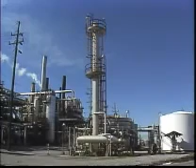In industrial facilities, many operations depend on heating or cooling process fluids. For example, the liquid entering this distillation column is heated to enable the distillation process to occur, while this process liquid is cooled so that it can be properly stored. This heating and cooling is done by transferring heat from one fluid to another in devices called heat exchangers. To understand how heat is transferred, it's important to understand what heat is.

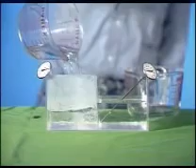Heat is a form of energy that's associated with the movement of molecules in a material. This energy can often be measured as temperature. For heat transfer to occur, there must be a difference in temperature. When there is a difference in temperature, heat is transferred from the material with the higher temperature to the material with the lower temperature. Heat can be transferred between materials in three basic ways: by conduction, convection, and radiation.

With conduction, heat is transferred as a result of physical contact between two materials, or from one part of an object to another part of the same object.

Another form of heat transfer is convection. Convection is the transfer of heat within a moving fluid. Convection can be divided into two categories: natural convection and forced convection.

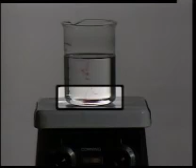We'll use this container of water and dye to show how natural convection works. As the water is heated, the water closest to the bottom is heated more than the water elsewhere. As the temperature of the water on the bottom increases, that water becomes lighter or less dense and rises upward. At the same time, the cooler water sinks to the bottom of the container.

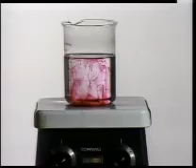So during natural convection, as heat is transferred to the water, the difference in densities causes the water to circulate in the container. This circulation helps to transfer heat throughout the water.

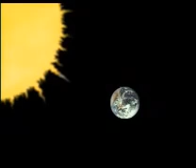The third form of heat transfer is radiation. Radiation is the transfer of energy by electromagnetic waves. Microwaves and light waves are examples of electromagnetic waves.

When electromagnetic waves strike an object, they may be transmitted through the object, reflected off the object, or absorbed by the object. If a wave is absorbed, its energy is transferred to the object and the temperature of the object increases.

In a typical heat exchanger, heat is transferred by conduction, convection, and radiation from one fluid to another. As a general rule, most heat transfer occurs by conduction and convection.

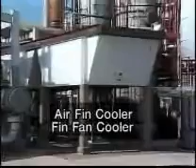To get a better understanding of how heat transfer occurs in a heat exchanger, we'll use this heat exchanger. It's called an air fin cooler, or a fin fan cooler. It's used to transfer heat from a process fluid to the air that flows through the cooler. The cooler consists of a series of tubes, each of which has thin metal fins.

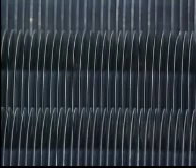The heat exchanger also has a fan. During operation, the fluid being cooled passes through the tubes. The fluid transfers heat to the tubes by conduction and convection. Some of this heat is then transferred through the tubes and into the fins by conduction. From there, heat in the tubes and the fins is transferred by conduction and convection to the surrounding air.

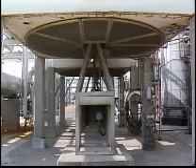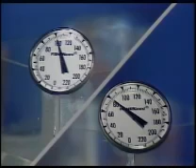To increase the amount of heat transferred to the air, the fans in the cooler can be started. This increases the airflow through the cooler, which increases the amount of heat that is transferred by convection to the surrounding air. For example, as the difference in temperature between the two fluids in a heat exchanger increases, the amount of heat that can be transferred also increases.

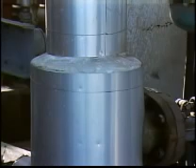The amount of surface area in a heat exchanger is another factor that affects heat transfer. Basically, the greater the surface area, the greater the amount of heat transfer that can occur. Another factor that can affect heat transfer is the type of material that the heat is transferred through. Materials that are more dense are better at transferring heat and are normally used as conductors of heat. On the other hand, materials that are less dense will transfer less heat and are normally used as insulators.

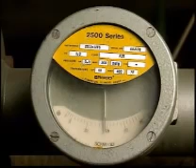The flow rates of the fluids involved also affect the amount of heat that can be transferred. Generally, as the amount of fluid that passes through a heat exchanger increases, the amount of heat that can be transferred also increases. Heat transfer can also be affected by the presence of contaminants in the fluids.

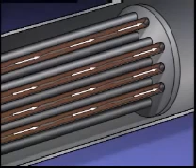These contaminants, or impurities, can build up on a heat exchanger and form another layer of material that the heat must transfer through. This layer of material will act as an insulator, and the amount of heat that can be transferred in the heat exchanger will decrease.

In this topic, we talked about heat and heat transfer, and we looked at how heat can be transferred by conduction, convection, and radiation. We also looked at how heat is transferred inside a heat exchanger, and we discussed factors that can affect heat transfer.

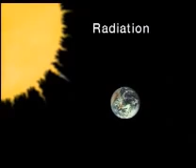The third form of heat transfer is radiation. Radiation is the transfer of energy by electromagnetic waves. Microwaves and light waves are examples of electromagnetic waves.

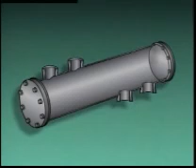Since shell and tube heat exchangers are one of the most common types of heat exchangers, you need to be familiar with their components and operation. We'll use this illustration of a shell and tube heat exchanger to explain how it works.

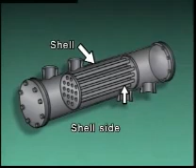The main components include a shell, a group of tubes called a tube bundle, tube sheets, and heads. The shell is the casing of the heat exchanger. The area inside the shell and outside the tubes is commonly called the shell side of the heat exchanger. The shell also has an inlet and an outlet.

The tubes are used to create a separate flow path through the shell. Each end of the tubes opens into a head. One head directs flow into the tubes, while the other head directs flow out of the tubes. The area inside the tubes and heads is called the tube side of the heat exchanger. The heads also contain a tube side inlet and outlet.

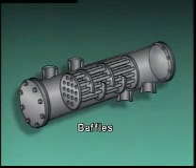The ends of the tubes are supported by the tube sheets. The tube sheets also isolate the heads from the shell side of the heat exchanger. The tubes are supported inside the shell by partitions called baffles. The baffles also direct flow through the shell side of the heat exchanger, which helps increase the efficiency of the unit. Here's how this heat exchanger works.

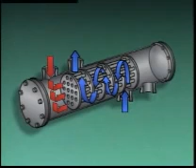During operation, the cooler fluid enters the shell, flows around the tubes, and leaves through the shell outlet. On the tube side, the hotter fluid passes through the inlet head, through the tubes, into the outlet head, and leaves through the tube outlet.

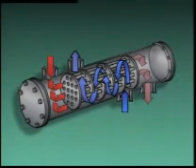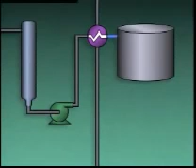The hot liquid passes through the heat exchanger and transfers some of its heat to a coolant that flows through the shell side of the heat exchanger. The cooled process fluid is then sent to a tank where it's stored.

In this system, the heat exchanger is used as a heater. The process liquid that's pumped through the heat exchanger tubes is heated by steam that flows through the shell side of the heat exchanger. The heated liquid is then sent to a process reactor.

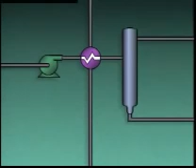In the reactor, additional materials are mixed with the liquid, and a chemical reaction occurs. By heating the process liquid, the heat exchanger enables the chemical reaction to take place more efficiently.

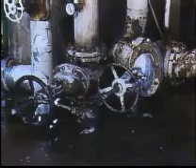In order to get fluids into and out of a heat exchanger and make sure that heat transfer occurs efficiently, some auxiliary components are needed. These auxiliary components include valves, instruments, and steam traps.

There may be many different valves used with a heat exchanger. For example, isolation valves may be located on a heat exchanger's inlet and outlet. They're open to place the unit in operation and closed to isolate the unit when it's taken out of service.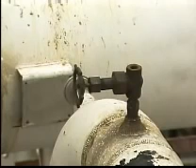Many heat exchangers also have drain valves. These valves are used to remove fluid from the heat exchanger when the unit is shut down. Vent valves are also found on heat exchangers. Vent valves are used to remove air or other undesirable gases from heat exchangers.

If pockets of air or gas are trapped inside the unit, they can prevent process fluids from coming into contact with some of the tubes. When this happens, the heat exchanger won't be able to transfer heat properly. These pockets reduce the heat exchanger's efficiency and can produce hot spots.

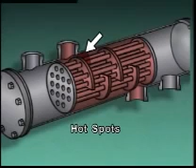A hot spot is an area in the heat exchanger where temperatures become excessive. These areas of high temperature can damage the heat exchanger. Another valve that's commonly found on a heat exchanger is a relief valve. Relief valves are used to prevent overpressurizing heat exchangers. If the pressure exceeds a preset limit, the relief valve opens to relieve the pressure.

The relief valve will remain open until the pressure falls below the preset limit.

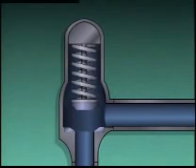Another type of valve commonly used with heat exchangers is a control valve. Control valves are used to regulate the flow of fluids through heat exchangers. For example, the flow of the heating or cooling fluid is often regulated to control the temperature of the process fluid leaving a heat exchanger.

In this system, the control valve is linked through an instrument system to a device that senses the outlet temperature of the fluid. As the fluid's temperature changes, the sensing device sends a signal through a controller to the control valve actuator, which opens or closes the control valve and regulates flow to maintain the desired temperature.

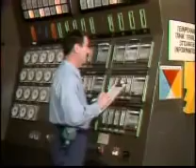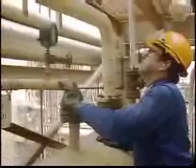Generally, an operator can observe instruments to determine if a heat exchanger is operating properly. These instruments are often located in the control room, but they may also be found on or near the heat exchanger. Depending on the heat exchanger and its use, pressure and temperature gauges may be placed on any or all of the heat exchanger's inlets and outlets.

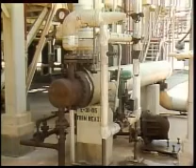On heat exchangers that use steam, an auxiliary device called a steam trap is often used. The steam trap drains water or condensate from the steam in the heat exchanger without letting the steam escape. Lost steam reduces the efficiency of the heat exchanger.

The basic function of all heat exchangers is to heat or cool fluids. But even though they all do the same basic job, they're often designed differently. For example, the shells and tubes of heat exchangers are often designed to create certain flow paths. These flow paths determine the number of times the fluids pass by each other and the direction or type of flow through the heat exchanger.

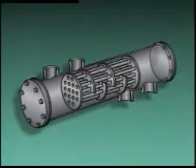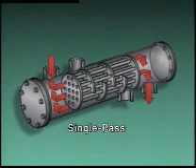This shell and tube heat exchanger can be described as a single pass unit. The fluid on the tube side enters one head and exits from the other head. The shell side fluid enters here, flows in the opposite direction, and exits here. The two fluids pass each other only once.

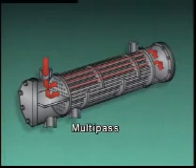This heat exchanger is designed so that the tube side fluid passes the shell side fluid twice. The tube side fluid enters here and is directed through half of the tubes by the inlet head. After passing through the first half of the tubes, the fluid is directed into the rest of the tubes by the return head. The fluid then passes through the rest of the tubes and is directed out of the heat exchanger.

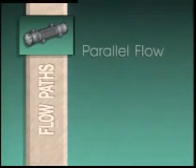Besides the number of passes, the flow paths inside a heat exchanger can also be used to categorize types of heat exchangers. There are three general categories for the flow path through a heat exchanger: parallel flow, cross flow, and counterflow.

In a parallel flow heat exchanger, the shell side fluid and the tube side fluid move in the same direction. In this heat exchanger, the tube side fluid passes through the tubes in this direction, and the shell side fluid passes around the tubes in the same direction.

In a cross-flow heat exchanger, the fluids flow perpendicular to each other. The tube side fluid enters through this inlet, flows through the tubes, and exits through this outlet. The shell side fluid enters the shell through this inlet, flows across the tubes, and leaves the shell through this outlet.

In a counterflow heat exchanger, the fluids move through the shell and tubes in opposite directions. During operation, the tube side fluid enters this inlet, passes through the tubes, and leaves the unit through this outlet. On the other side of the heat exchanger, the shell side fluid enters this inlet, flows around the tubes, and leaves the unit through this outlet.

With parallel flow heat exchangers, the temperature difference between the two fluids is greatest where the two fluids enter the heat exchanger, so the amount of heat transfer is greatest at this point. By the time the fluids are near the outlets, there is little or no temperature difference, so little or no heat is transferred.

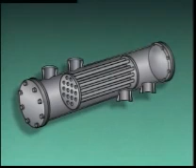Counterflow is often the most efficient of the three types of flow, because the temperature difference between the two fluids remains relatively constant as the fluids pass side by side. As a result, heat transfer between the fluids can take place the entire time that they're in the heat exchanger.

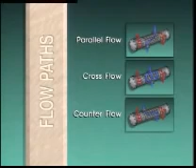When the temperature difference between the two fluids in a heat exchanger that uses cross-flow is plotted on a graph, it appears to be very similar to the graph for a counterflow unit. Cross-flow units are often used to condense process vapors.

In this topic, we talked about shell and tube heat exchangers. We looked at the basic parts that make up this type of heat exchanger, and we described different ways that fluids can flow through them.

Now let's try some practice questions that relate to this material.

The tubes are used to create a separate flow path through the shell. Each end of the tubes opens into a head. One head directs flow into the tubes, while the other head directs flow out of the tubes. The area inside the tubes and heads is called the tube side of the heat exchanger.

The heads also contain a tube side inlet and outlet.

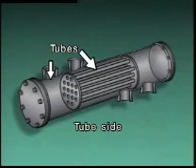On heat exchangers that use steam, an auxiliary device called a steam trap is often used. The steam trap drains water or condensate from the steam in the heat exchanger without letting the steam escape. Lost steam reduces the efficiency of the heat exchanger.

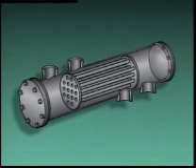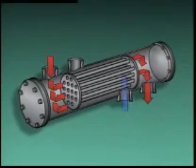In a counterflow heat exchanger, the fluids move through the shell and tubes in opposite directions. During operation, the tube side fluid enters this inlet, passes through the tubes, and leaves the unit through this outlet. On the other side of the heat exchanger, the shell side fluid enters this inlet, flows around the tubes, and leaves the unit through this outlet.

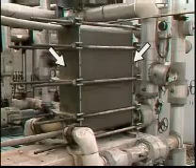All plate heat exchangers work basically the same way, so by looking at the components of a typical plate heat exchanger, you'll better understand how all plate heat exchangers work. This plate heat exchanger consists of a series of thin metal plates and two fixed end plates. The end plates are used to help support the other plates, and they hold the fluid inlets and outlets. The plates inside the heat exchanger have a corrugated or ridged surface.

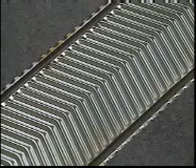The ridges cause turbulence as the fluid passes over the plate. The turbulence helps increase the amount of heat that's transferred. The plate also has portholes. These portholes direct the flow of fluid between the plates. Near the portholes are flow directors that distribute the fluid evenly over the plates.

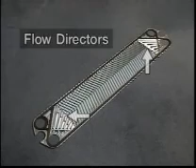Between each two plates is a gasket which separates the plates and creates a channel between them. The gaskets also seal the plates together so that the process fluids won't leak out of the heat exchanger. The gaskets also seal around the portholes so that the two fluids won't mix together and contaminate each other.

In this topic, we focused on one type of heat exchanger commonly found in plants, a plate heat exchanger. We looked at the parts that make up a plate heat exchanger, and we saw how the unit operates. Now let's try some practice questions that relate to the material.

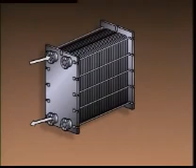In this counterflow plate heat exchanger, the hot fluid enters through this port and exits through this port. With that in mind, select where the cold fluid enters the heat exchanger.

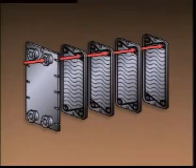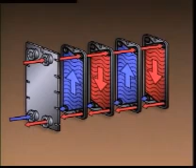If we look at a few of the individual plates, we can see that during operation, the hot fluid enters this inlet, flows through the portholes, and passes downward between the plates. The fluid then flows into the portholes at the bottom of the plates, where it's directed to the hot fluid outlet. The cold fluid enters the heat exchanger on the bottom and passes through another set of portholes at the bottom of the plates.

The cold fluid then flows upward on the opposite sides of the plates and exits the portholes at the top of the plates. From there, it's directed to the cold fluid outlet. Keep in mind that the plates are actually back to back, so the two fluids pass each other on opposite sides of a plate, moving in opposite directions.

This plate heat exchanger consists of a series of thin metal plates and two fixed end plates. The end plates are used to help support the other plates, and they hold the fluid inlets and outlets. The plates inside the heat exchanger have a corrugated or ridged surface. The ridges cause turbulence as the fluid passes over the plate. The turbulence helps increase the amount of heat that's transferred.

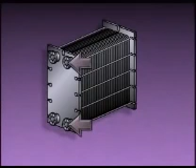In this counterflow plate heat exchanger, the hotter fluid enters the unit here. Select the arrow to the port where the colder fluid enters the heat exchanger.

In this counterflow plate heat exchanger, the cooler fluid enters here and flows upward. Select the arrow to the inlet for the hotter fluid.